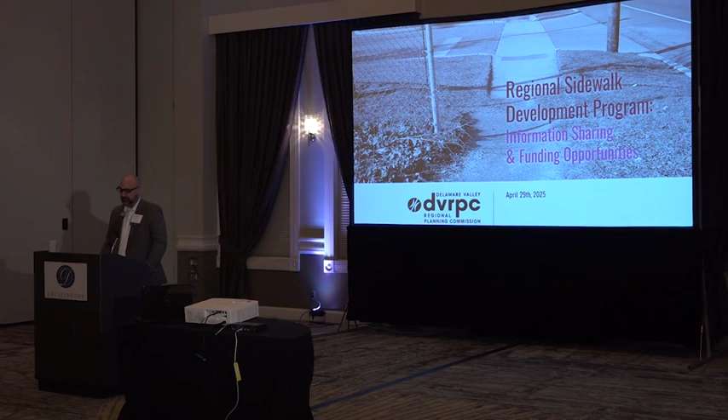My name is Joe Natale, the System Manager of the PA TASA program at DVRPC. If you don't know what TASA is, we'll get into that. I'm here today to present on the Regional Sidewalk Development Program, do some information sharing, and talk about funding opportunities, specifically TASA. That is what I do for my day job, so I'll be talking a lot about that, but presenting on a couple different sections within DVRPC.

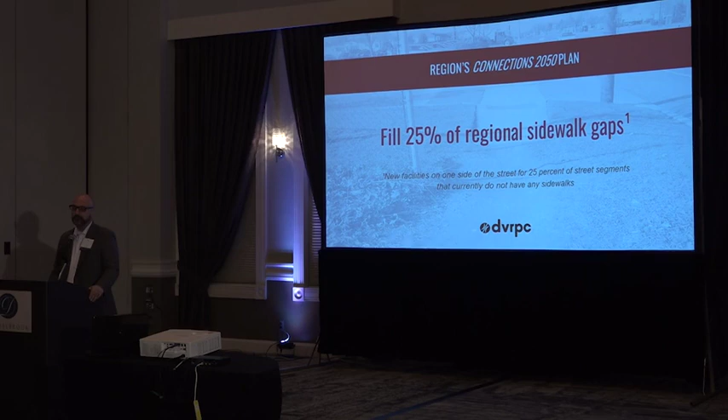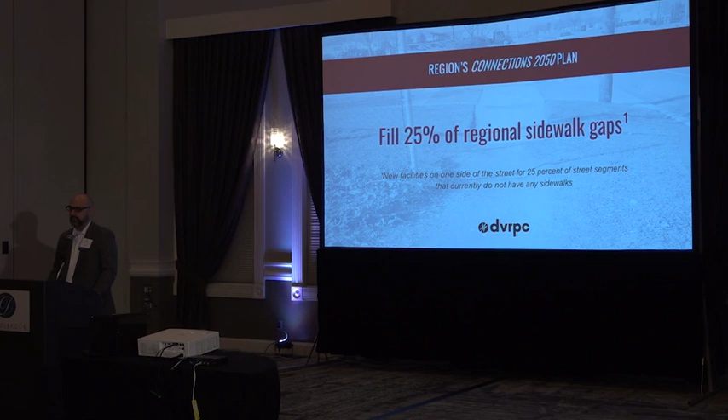For those of you that don't know about our Connections 2050 plan, there are many different sections of it, but specific to sidewalks, we're looking to fill 25% of the regional sidewalk gaps, specifically new facilities. We have a bunch of different ways to do this, and if you were in the session earlier with Allison and Ryan, they talked about a lot of the different resources that we have at DVRPC. I'm going to go through a few of them and some potential upcoming ones, and I don't expect us to go into the lunch hour, so here's our agenda today.

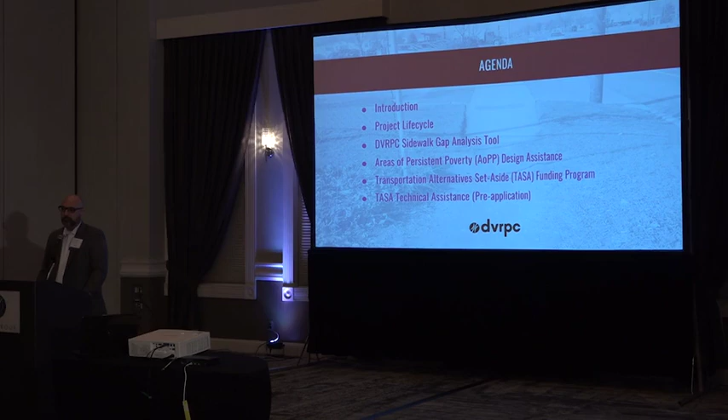Quick introduction of me, then go through the project life cycle for typical projects, specifically sidewalks, but also touch on trails. I will introduce the upcoming DVRPC Sidewalk Gap Analysis Tool, the Sidewalk Index, and talk about our Areas of Persistent Poverty grant that we applied for with SEPTA, which specifically has design assistance for these types of projects. I will spend a good amount of time talking about the Transportation Alternatives Set-Aside program, the TASA program, and its upcoming funding opportunity. And specific to TASA, we have technical assistance available, which I manage here at DVRPC.

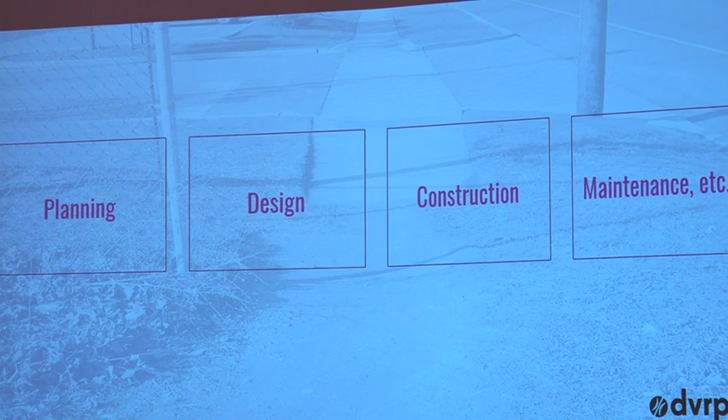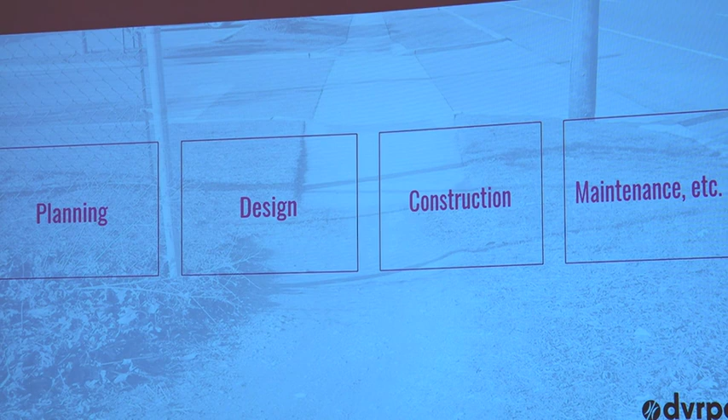As you might have heard in the previous session, or if you don't know, a typical project life cycle goes through a number of different steps. These are very top-level descriptions. All the planning efforts go into the planning box, which can take years or even decades for some larger projects. Once they get identified as priorities, they move into preliminary engineering and final design, which itself can take a number of years depending on the level of involvement with the state and federal level. Once those get advertised and bid, they go to construction, where they'll need construction funding, and finally, as the owners of the facilities, there will be maintenance and other considerations for different types of projects that you need to be aware of.

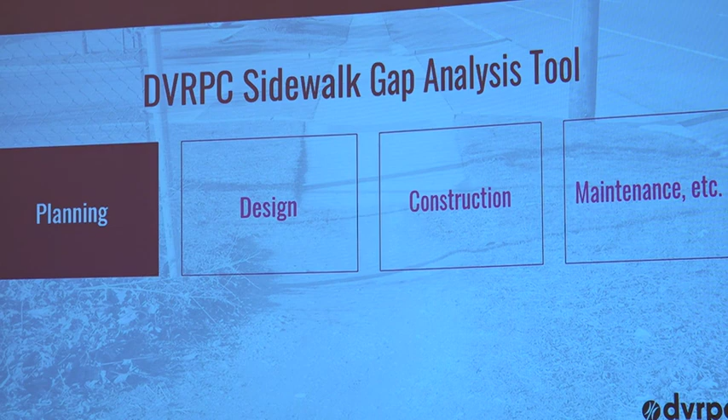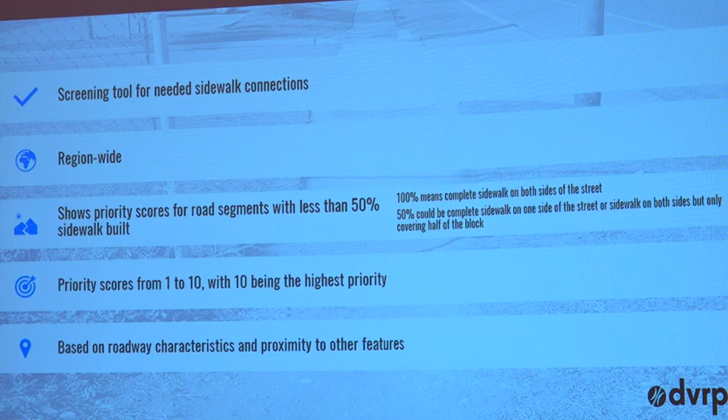Specifically, the DVRPC Sidewalk Gap Analysis Tool, the Sidewalk Construction Index - I'll talk about first, is a planning tool. You'll see on this slide there are a number of different steps to this that DVRPC staff have taken into account when developing this tool. It is still under construction, so it hasn't been publicly released. We've used it to do some preliminary analysis, but it is region-wide, and it is a screening tool for sidewalk connections.

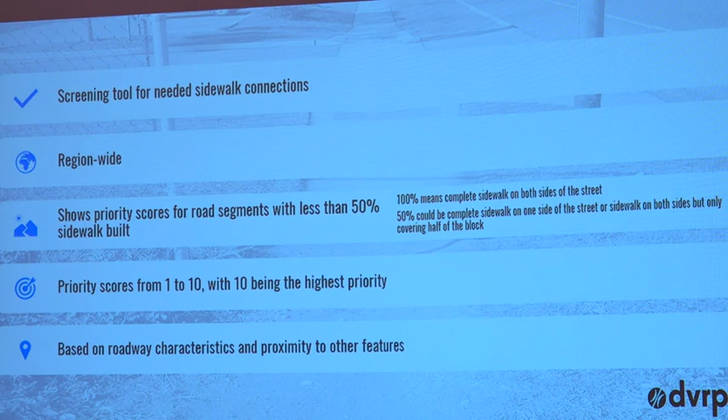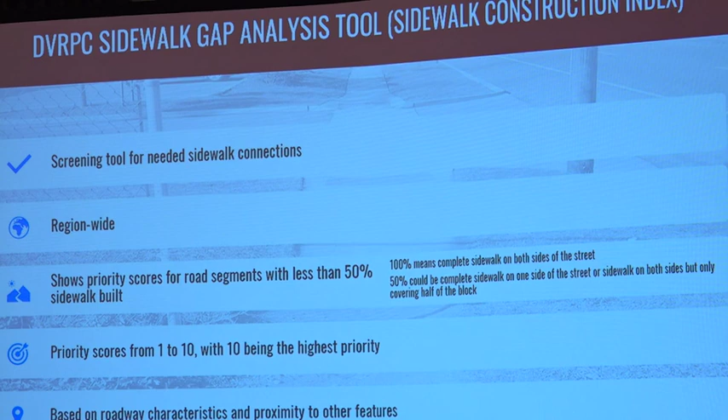Essentially, sidewalks and sidewalk areas will get a score that will allow municipalities, counties, or the state to prioritize different projects. It can show the priority for different road segments. It focuses on areas that have less than 50% of their sidewalks built, and it prioritizes them 1 to 10, with 10 being the highest priority. I'll show how the scoring system is currently laid out and will be tweaked.

We use the data that we have available to us, and it is a relatively computing-intensive scoring system. So we've already run this analysis, and the tool, when it becomes available, will be a simple GIS click-and-find-out information tool, where you can also input your own information.

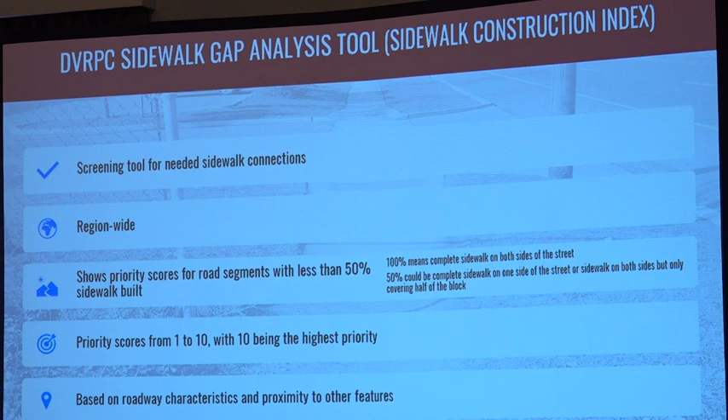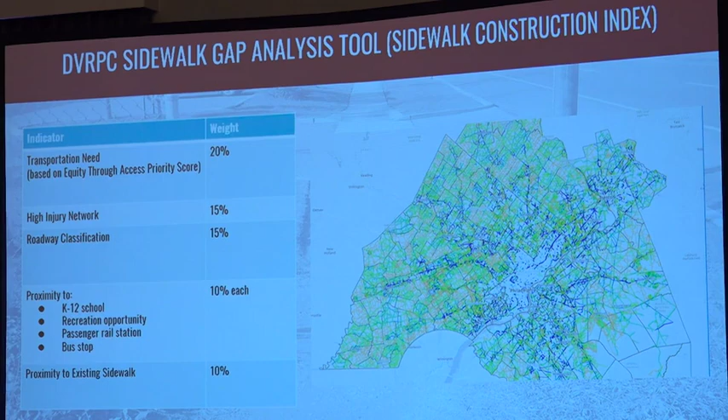So this is what it will look like on the right, not dissimilar to the PA1 map images we might have seen earlier, where you can zoom in and see different sidewalk gaps. Different colors will mean different things. This scoring rubric on the left is still being developed. It is not the final scoring.

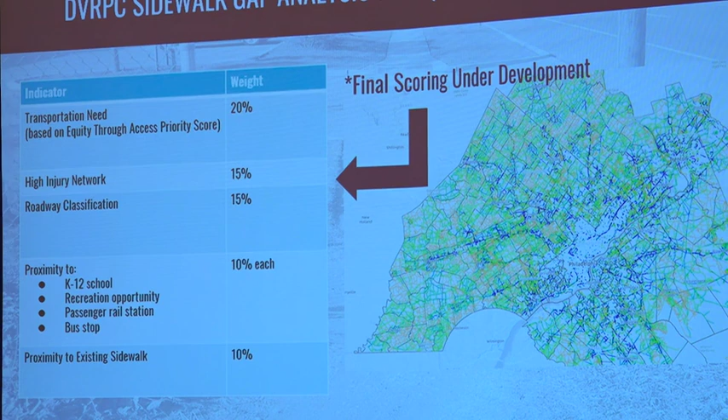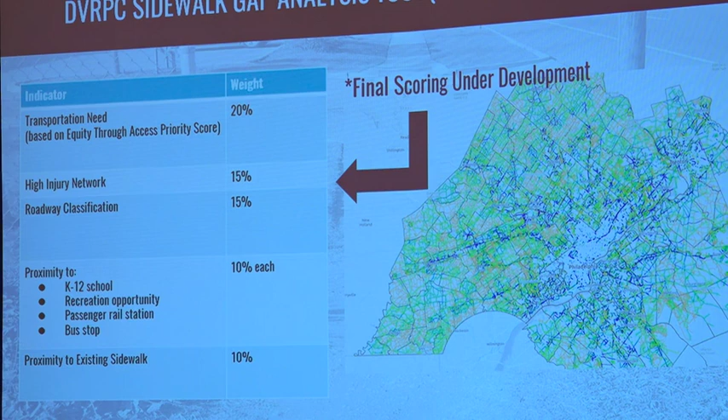We had some additional input from our partners as to what would make a valuable criteria - where the sidewalk gaps fall on the high injury network, their proximity to K through 12 schools, recreational facilities, bus stops, things of that nature, and then the proximity to existing sidewalks. We don't want to just build sidewalks even if there is a gap, making smaller gaps. We want to make connections, so find logical termini for projects.

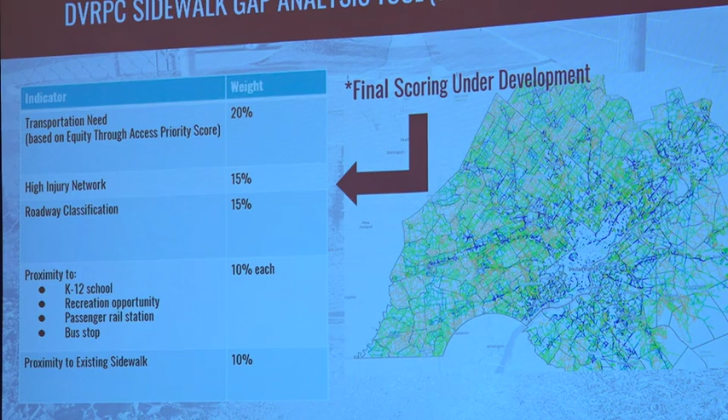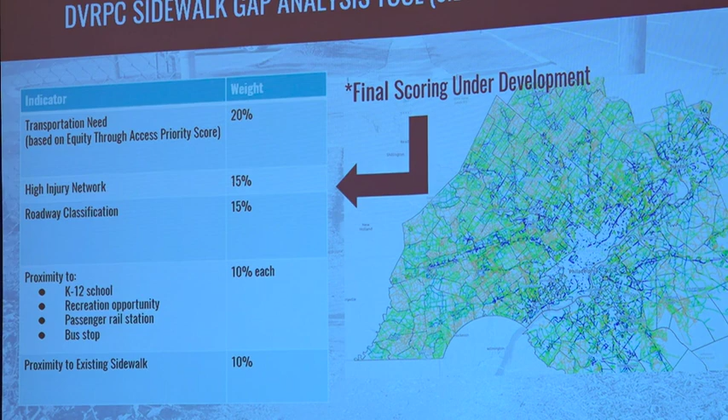So all of that goes into this computation that then identifies different scores for different sections. So when you identify different sidewalk gaps in your municipalities, you can then use them to prioritize where the money is best spent.

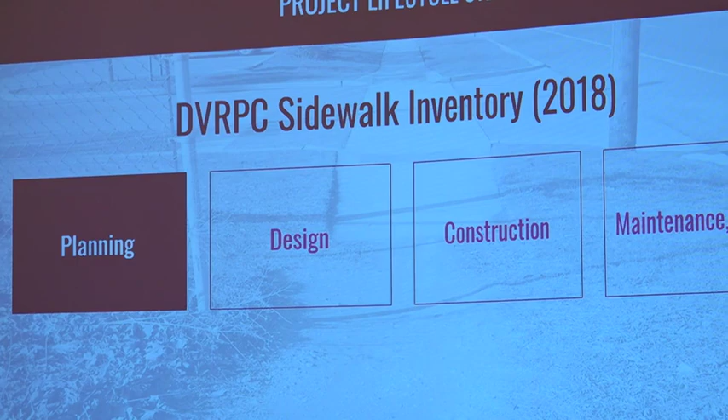So we do also have the sidewalk inventory, which is a little bit more robust, but is also an older data set. This is not necessarily used for prioritizing the same way, but you can view our regional sidewalk map at walk.dvrpc.org. You may zoom in and you'll see on this image it's not showing up great, but there are certain areas of the map where we do not have data. The collection for this data is relatively labor intensive, so as far as costs go, we don't update it too often.

However, you can provide this data to us. You can email me and I can get you that contact information, or I believe there's a way to do it on the website itself to suggest improvements. So you say, hey, we have a sidewalk here, on one side of the road, 2 sides of the road, we have ADA ramps. If you were to zoom in, you can click individual segments, individual corners and crossings, and anything we have data on in our database is a part of this map.

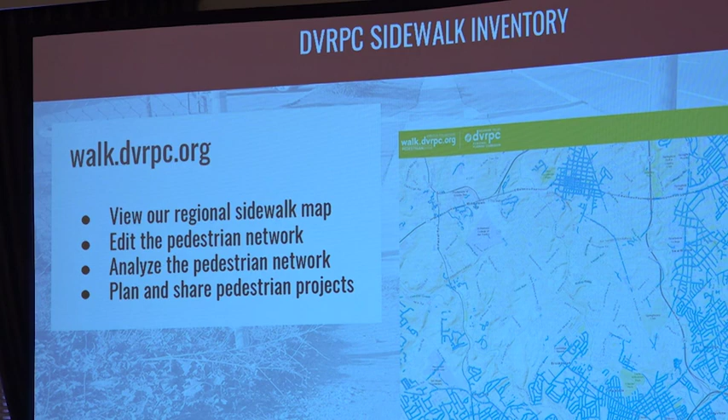You can use it to edit the pedestrian network, where you would provide updates that have happened since 2018 if they're not on the map already. Analyze your pedestrian network, plan and share pedestrian projects. This is a public database, so when you make changes, they would likely need to be things that have already been constructed. This is not a planning proposal - this is things that have already been constructed.

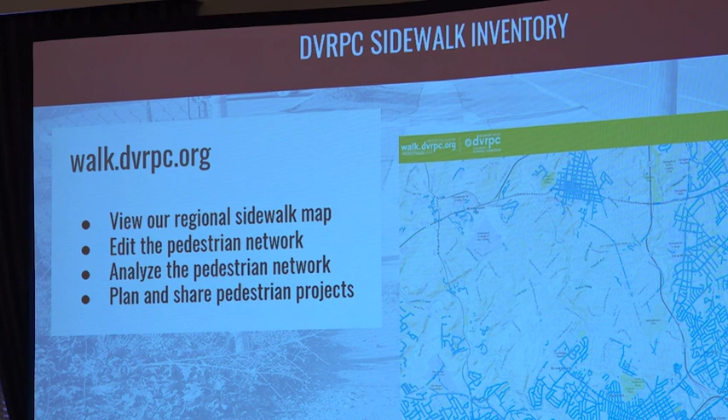Like I said, it was last updated in 2018. Incremental updates can be emailed directly to us or updated on the website, or submitted on the website.

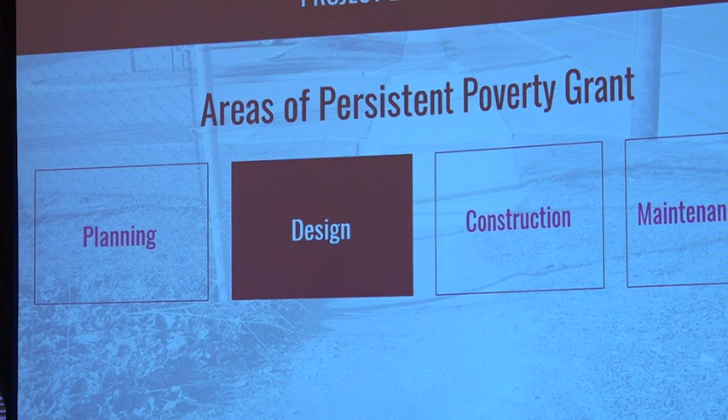So the Areas of Persistent Poverty Grant, which is a federal program - we see a lot, both on the planning side and in the implementation side, which is where I work, that a challenge to municipalities is the design. So design costs are very often the match for construction funding. Municipalities that maybe don't have the same amount of funding or cash flow will be more hesitant to apply for grants, for construction grants.

So when we made this application with SEPTA to the Federal Transit Administration, the intent was to provide that design funding. So I believe somewhere in the $400,000 range, grant funding will provide maybe 2 or 3 projects worth of design funding

to a separate construction funding program. So in partnership with SEPTA, we did apply and were awarded this grant from FTA.

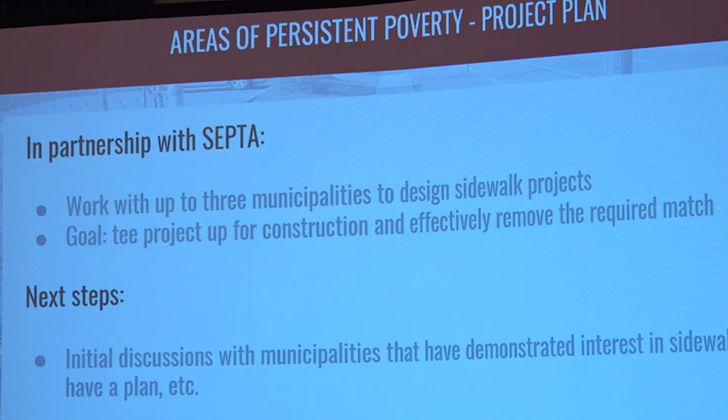We are currently soliciting municipalities who are interested in this design. It might sound silly, but we have a hard time getting municipalities on the phone and then following through with wanting to receive this funding. And they don't actually receive it - it's not a pass-through. We will be working with SEPTA to coordinate the designer. It's just we need buy-in. We need engaged municipal partners.

So it says at the bottom there, the initial discussions with municipalities that have demonstrated interest in sidewalk gaps. We are specifically looking for projects in or around SEPTA facilities, things that will connect neighborhoods to the SEPTA stations, bus stations, rail stations, things of that nature. Again, this will be covering the design costs, which is usually the match for construction. The intent being that once you have a designer underway, you could apply to another source of funding for construction.

It's not set right now for construction, but for example, the TASA program, which I will be talking about in a second, would be a great source of construction funding for this program, which essentially the only costs due to the municipality would be the staff costs. So your project manager on your side of things, coordinating with the designer, and someone like myself for the construction or design and construction.

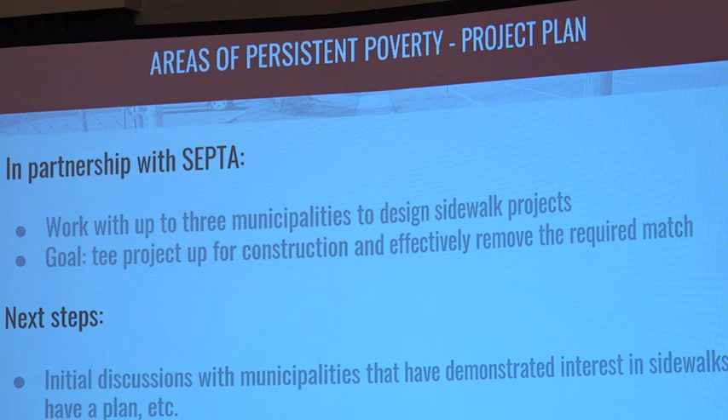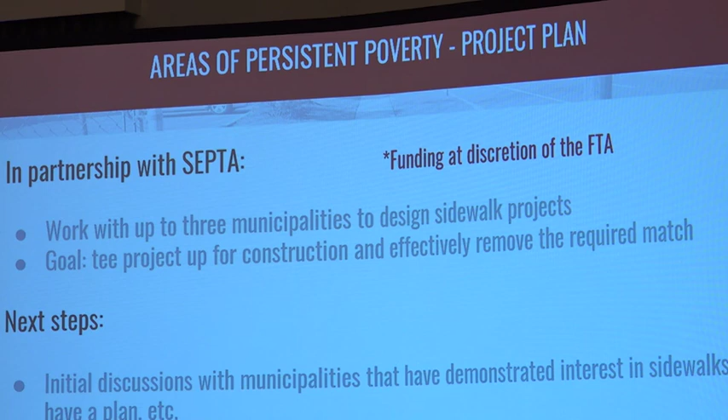As anyone who's watched the news is aware, this funding is technically subject to the FTA, so we're not expecting this to go away anytime soon, but we don't have a crystal ball, so in theory this could go away. We've had no indication of that, so we're moving forward with SEPTA to coordinate those project selections, and once we have the selections, soliciting an engineer.

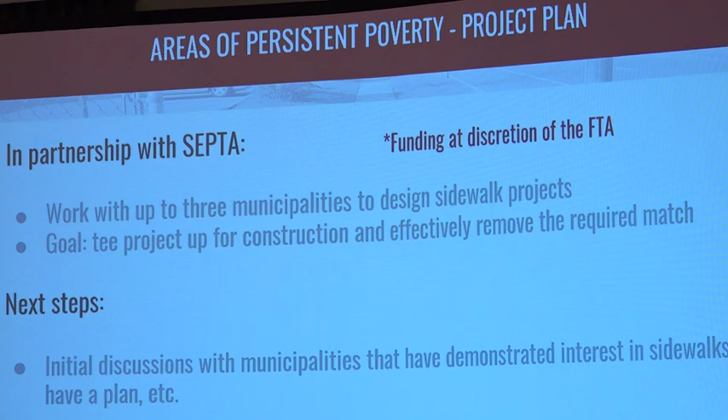I don't know if you're going to be able to read this. Oh yeah, you can probably read that. So these are using that scoring tool that's being developed.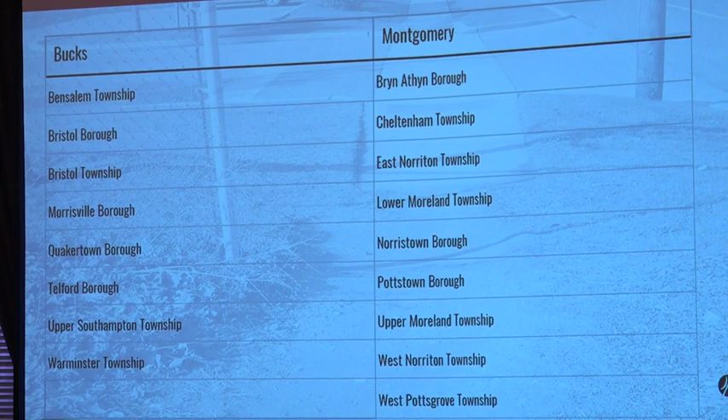First, the construction index. We pulled the list of municipalities that both have a certain score—I forget the actual score used, but some threshold—that have sidewalk gaps within a certain distance from a SEPTA station, and that also fit the persistent poverty criteria of the original grant.

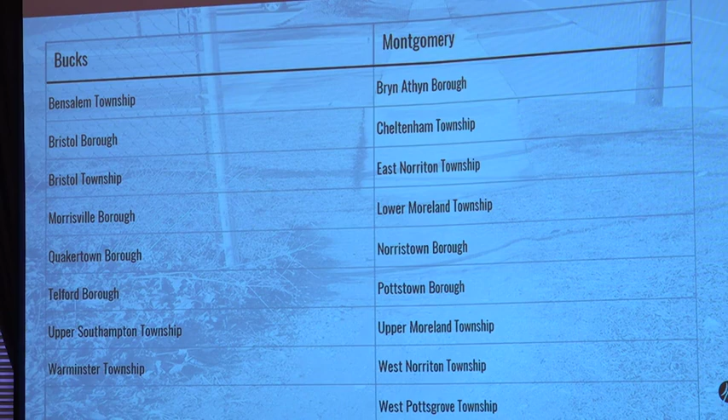So this is Bucks County and Montgomery County. If you're on this list and you're in this room, please come talk to me after, or send me an email, and we will get you at least a conversation, a quick Zoom meeting to talk about potential projects.

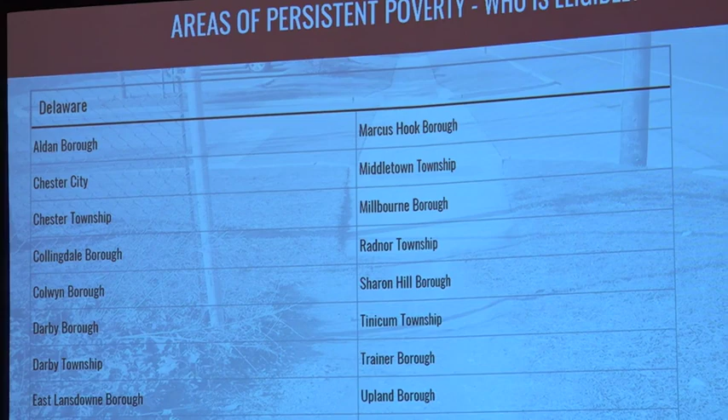You're probably more interested in the Delaware County one. So this is Chester, if you're on there. Let's see—yeah, there's the Delaware County municipalities. If you're on this list, I can bring this slide up again maybe towards the end of the presentation for Delaware County if anyone would like to look at it. And if you're interested in talking to us about the areas of persistent poverty grant, please talk to me.

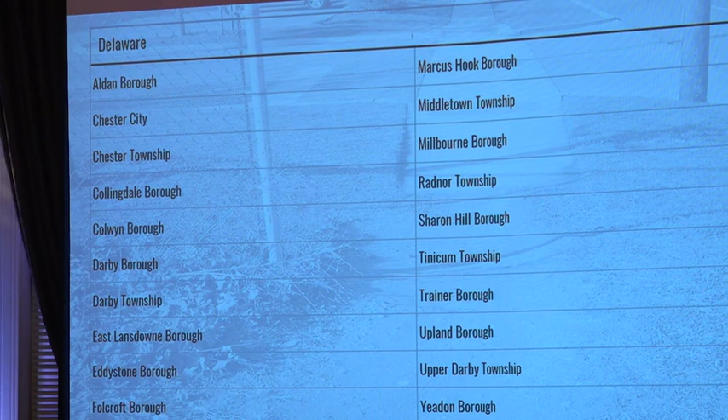I think I already covered this slide. Our municipalities with sidewalk gaps usually aren't applying for funding, because there are certain costs associated with even applying for these funding sources for construction. So we're trying to minimize that.

DVRPC has a couple different programs that do that, kind of like the supporting communities program that Allison had talked about earlier. This particular grant is for design, so it'll be more DVRPC staff assisting with the application process, but we want to make it as easy a lift as possible.

And I will talk about the technical assistance, which will help with that interim between planning and the construction application. So my whole bag is the Transportation Alternatives Set Aside, TASA program.

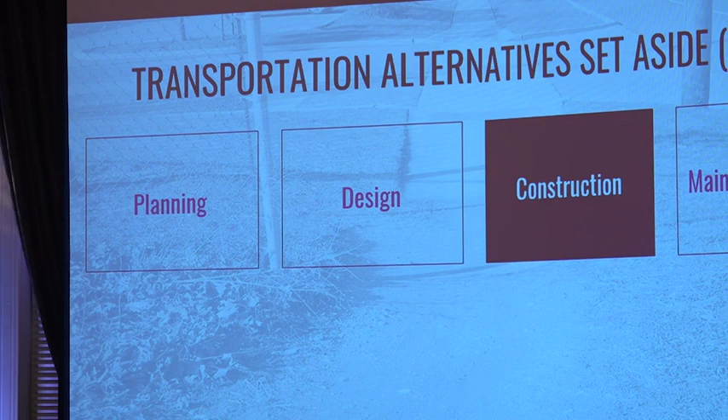These are what they call non-traditional transportation facilities, and I'll have a slide with all the different eligible project types, but 90% of what we see come in are bike and pedestrian facilities. So these are non-vehicular facilities.

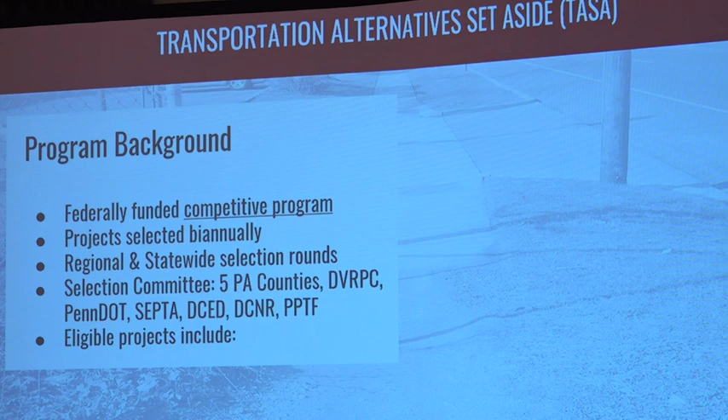The TASA program is a federally funded competitive program, and it's formula funded, so it is not discretionary, which is the bad word right now. So the state gets a certain amount of funding and they allocate it a certain way. The DVRPC region gets a huge chunk of it due to our population.

There's also a regional program where we get a pot of money and decide as a region, and then there's a statewide program. This is a biannual program, so every 2 years except for 2020 because of the pandemic—so 2021, 2023, and upcoming 2025.

There are 2 rounds of selection, although it's the same application process with roughly the same criteria. There's a regional selection, and then any project that doesn't get selected from the regional application pool gets sent up to the statewide level, of which we are also part of the selection process.

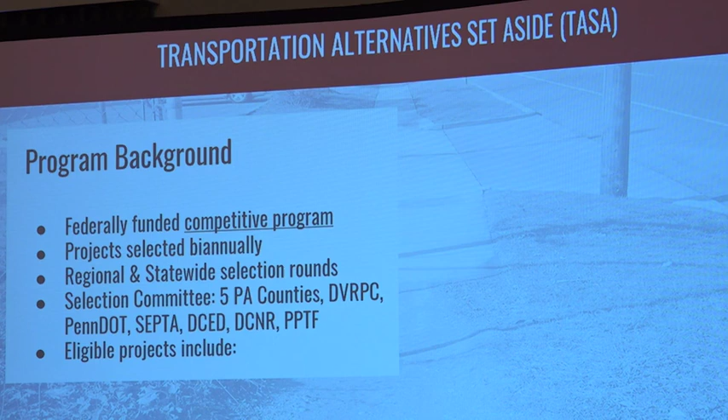The selection committee is made up of all of our planning partners—the 5 counties, Philadelphia and the 4 collar counties in Pennsylvania, DVRPC ourselves, PennDOT, SEPTA, DCED, DCNR, and the Public Participation Task Force, which is essentially made up of anyone who wants to be part of it, typically volunteers from our partners.

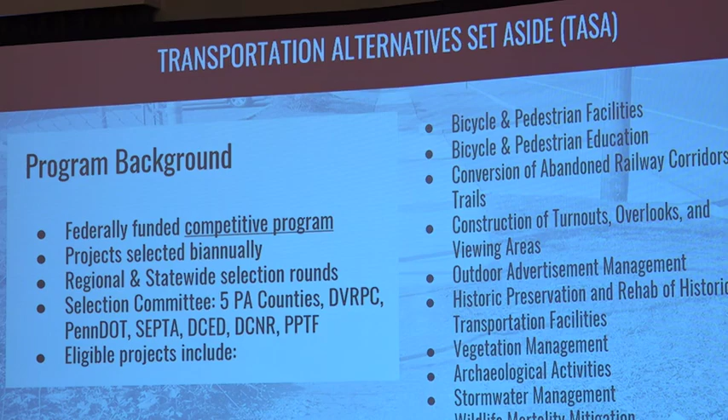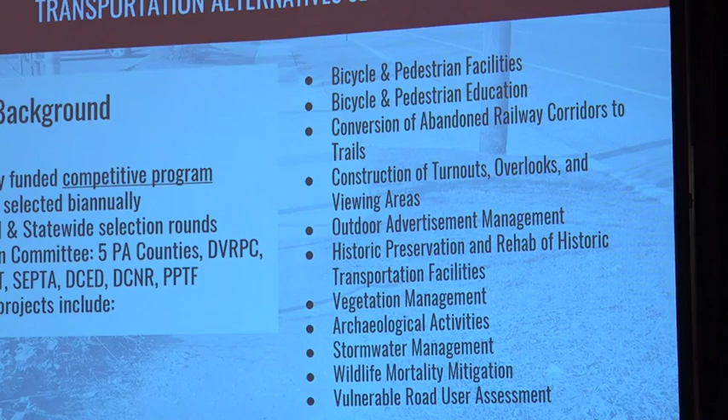Eligible projects include this list. You'll notice at the top, bicycle and pedestrian facilities. As I said, both from what gets applied for and what gets awarded, 90 to 95% of projects are bike and pedestrian facilities—trails, sidewalks, which is the point of today's presentation, crossings, ADA ramps, safe crossings, and pedestrian signals.

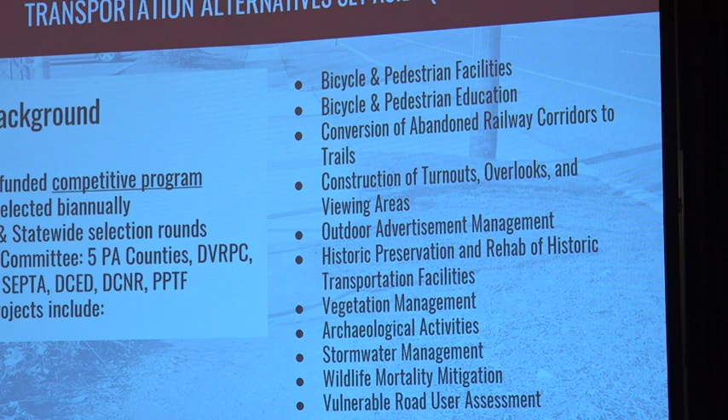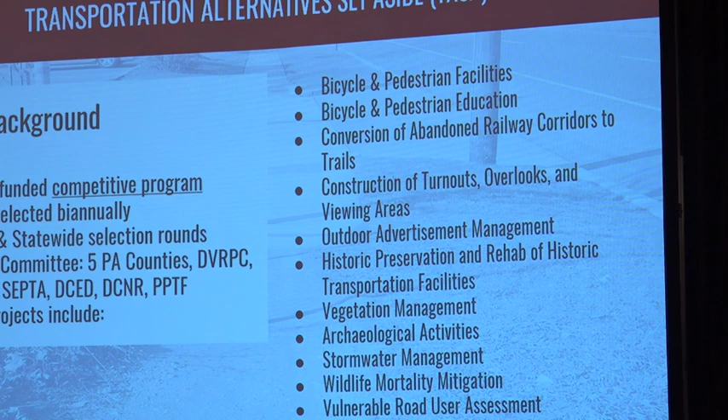We cannot pay for vehicular improvements with this program, although they could be part of the project through a different funding source—like if PennDOT is planning to redo an intersection and we want to combine that with ours. We've done that in Concordville, where we had a project putting in a trail, and PennDOT was putting in a roundabout, so they gave us their roundabout money and it became part of our project.

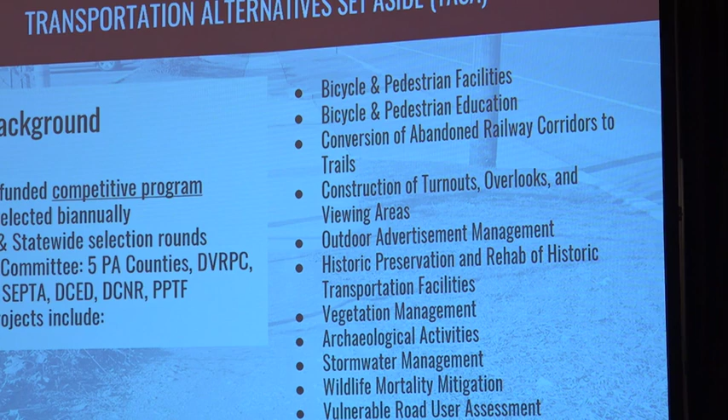Bicycle and pedestrian education are referred to as non-infrastructure projects. TMAs tend to be the ones that apply for those, doing outreach to schools teaching bicycle education and safety, or community outreach, things of that nature, and you can get funding for that. It's not technically supposed to be staff time, it's preparation for the events, but we're pretty flexible with how that works.

There's a whole list of other activities that I'm not even going to read. They're in the slide. They're not usually what people apply for because they don't make as competitive a project in our opinion, in the DVRPC region's opinion, but statewide, those are eligible projects.

One thing people tend to be interested in is stormwater management activities. Very rarely do we get a solely stormwater project, but we do get stormwater eligible activities included in our trail projects. For example, we're working with Lower Makefield Township in Bucks County to develop a project where they got $500,000 of construction funding for a $2.5 million project. We're looking to finish that funding gap for what is essentially a sidewalk, but that sidewalk will entail a good amount of stormwater improvements along Taylorsville Road, which is the reason they need all that extra money. The sidewalk itself wouldn't be too expensive, but the stormwater work is.

We've seen vegetation management, archaeological and historical structures go up there too. They typically have to have a transportation history, which is more of a rarity. And what are you doing with that? Because it still has to be bid through PennDOT's ECMS, so it tends not to be as helpful.

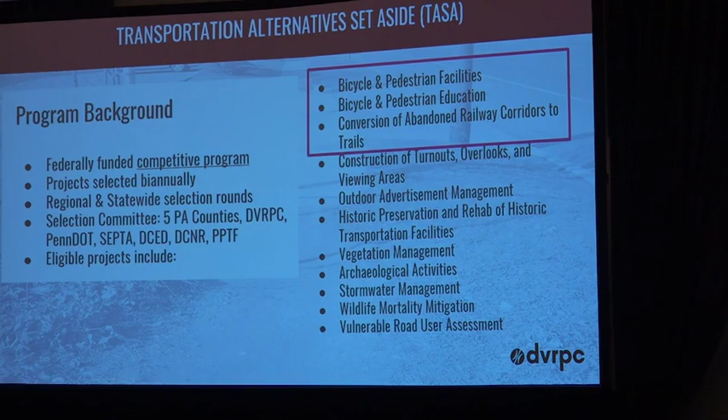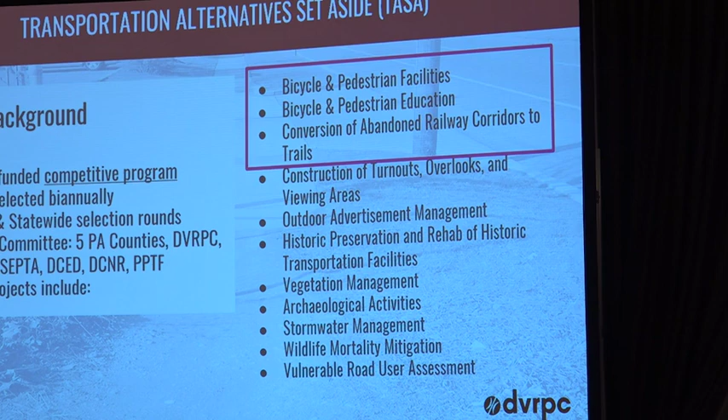Those top 3 bullets are what almost all of our projects that come in are for. The third bullet is actually just a specific type of project for the first one, because it's rails-to-trails projects like the Manayunk Bridge in Philadelphia. That was an old rail line converted into a very nice, wide structure. They actually got 2 projects, one for the construction of the facility itself, and another for the lighting and security system that allows it to be open 24/7 instead of just during daylight hours.

We then meet as a committee. The DVRPC staff, like myself and Joe Banks, manage the committee, which has separate DVRPC staff as voting members, but we manage the program on behalf of PennDOT, hosting our committee meeting in the late fall, early winter, making project selections for the regional committee, and then select which projects we're going to propose to the statewide level. I then sit on the statewide committee to do the same process, but against every project in the state, maybe 100 or 150 other projects to be competitive with. And then a certain amount of money gets allocated for that pot.

So we essentially have 2 different chances to get money for projects, and we can also split projects that are past the $1.5 million soft cap. The program does have a cap of $1.5 million for construction and construction inspection, but projects can exceed that if there's a demonstratable reason why they need to be over. For example, a bridge that is more than $1.5 million can't be cut in half.

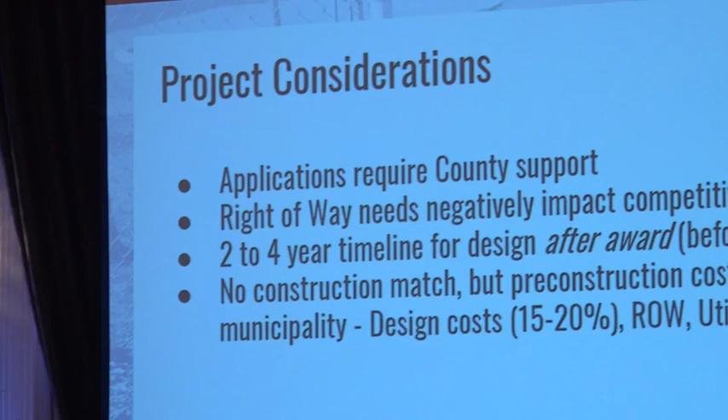Things to consider when making a TASA application: applications require county support almost exclusively. Right-of-way needs and environmental issues negatively impact your competitiveness of the project, but do not eliminate potential award, especially if you can demonstrate over the time between application and award that... yes, sir?

For the county support, would that be from the planning commission? Yes, the planning commission.

So like Peter Williamson, Lou Belmont, or not, Lou Huffnagel, Gina, all of them.

Like I said before, 2 to 4 year timeline for design. After you get the award in spring of 2026, 2 to 4 years is what we see for these projects. They could be done much faster, let's say if you did them yourselves or with your own construction funding, but because you have to do the federal process, which is the PennDOT process, it is a lot more paperwork and a lot more engineering costs.

There is no construction match, as often the case with some construction funding programs, because we say the pre-construction funds need to come from the sponsor, from the applicant. So those are your engineering design costs, your right-of-way utility costs that happen before construction, things of that nature. And that is, of course, unless you get an AOPP, Areas of Persistent Poverty grant, in which case design can be covered.

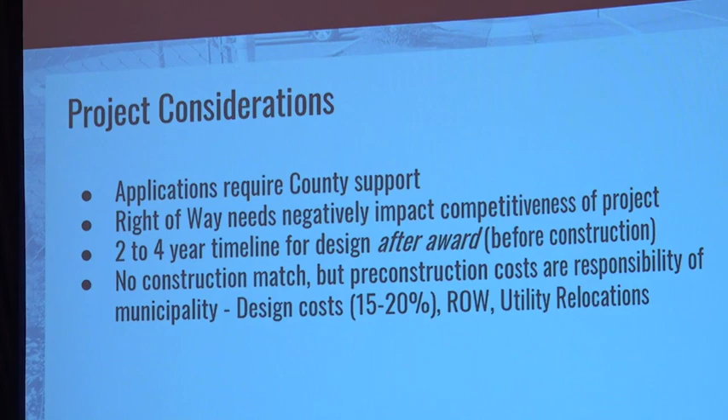But when budgeting these projects, if you're not getting that AOPP grant, if you're not one of the 3 municipalities that we may end up selecting for that, you should expect 15 to 20% of the construction cost in incurred costs by your municipality. So if it's a $1 million application for construction, plus some inspection money, you should expect and be able to show that you've budgeted for $200,000.

That all sounds like a lot to just build some sidewalks, so it is very important that you evaluate whether or not it's worth it. This is a longer, drawn-out process, a lot more red tape. The design takes longer, which then costs more money to pay an engineering firm.

And we see PennDOT costs, if you've ever bid a project through ECMS and through PennDOT, contractors bid their projects a little higher rather than a municipal level project. The same sidewalk could have a 50% increased cost. So what might cost you $400,000 might cost $700,000 with our program. Just things to keep in mind. Doesn't mean you've got 400 lying around and can just throw it at a sidewalk and not come to the program. So make sure it's worth it.

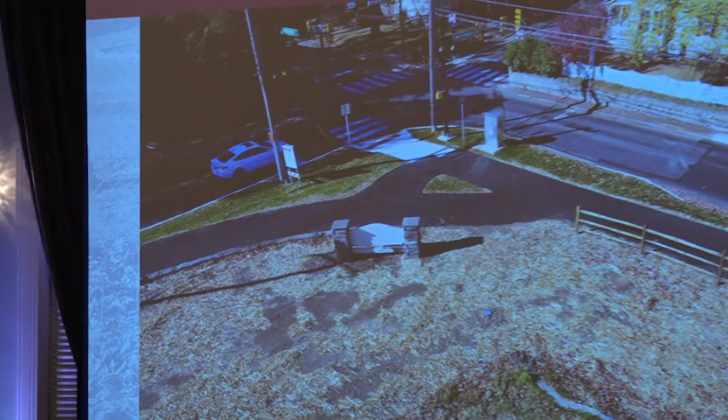Here are a couple quick examples of some projects that we've built over the last couple of years. This is in Abington, the Jenkintown Pennypack Trail. This was something like 1.5 miles of 10-foot shared use path connecting a school and a park, and then there was another section that connected a different section of the park to some public transportation facilities like other sidewalks.

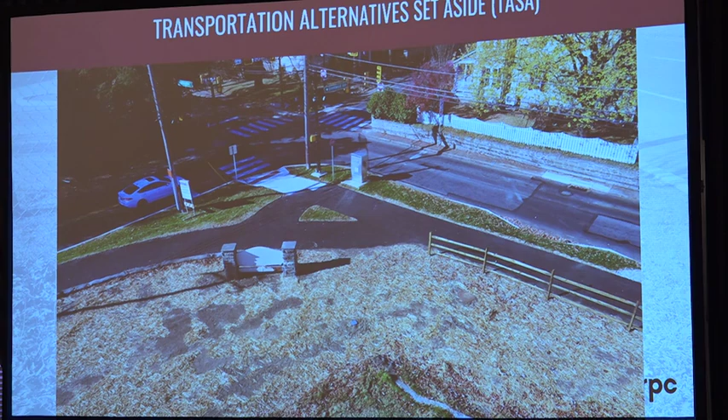This was originally one project for the shared use path, and then the township was going to be doing some stormwater work. Like I said, it made a lot more sense, it actually saved them some money to combine them. They had to contribute the money via their other grant for the stormwater work, but we were able to combine them and get them all done at the same time.

This is actually the other end of the photo that Allison showed in her presentation. This is in Lower Salford, just, I think, maybe like 800 feet of sidewalk and pedestrian safety and crossings in Lower Salford Township. This wasn't a complicated project. It happened to go through design a little bit faster, but the facility itself got built very nicely. It was designed, there was a lot of room on the roadway, so the projects can be relatively straightforward.

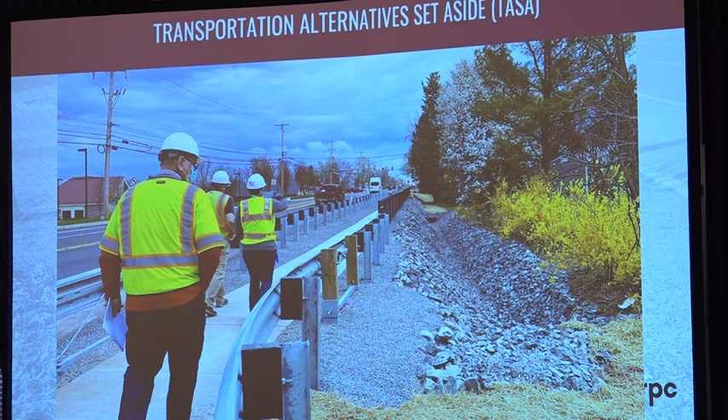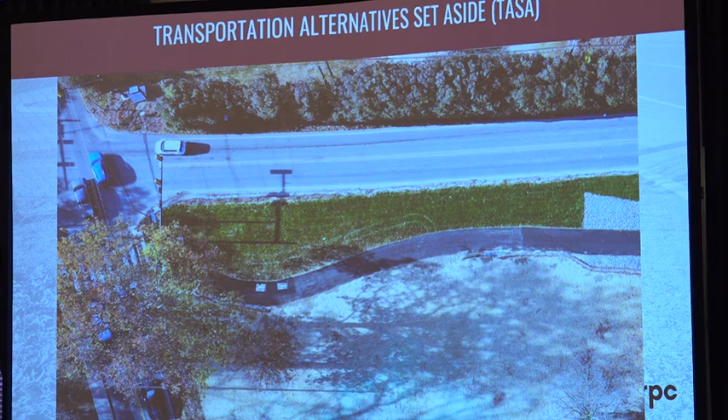They can also have obviously complications, but this is the other end of the Jenkintown Pennypack Trail project, just showing that we connected to an intersection. You can't quite see it in this photo, but that connected to an updated ADA ramp, that connected to a separate ADA crossing that connected more sidewalks throughout the township, Abington Township.

This is the Tookany Creek Bridge. That was a phase, I forget what phase number, one phase of a larger regional trail program project that is, I think, still in design right now, or is in construction, but a couple different sections of trail got broken up into many different awards. So Cheltenham Township and I think another neighboring township got these awards, and over the course of maybe 5 or 6 years got all of them funded in design and construction to then be built. And that is a pedestrian structure over Tookany Creek, something like 120 foot structure, and then being a little over $1 million just for the structure.

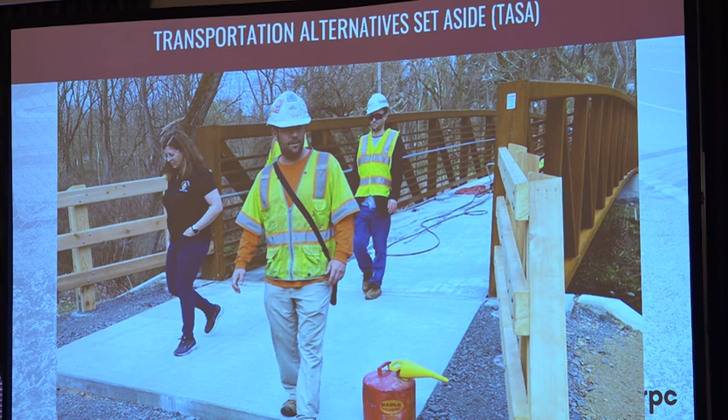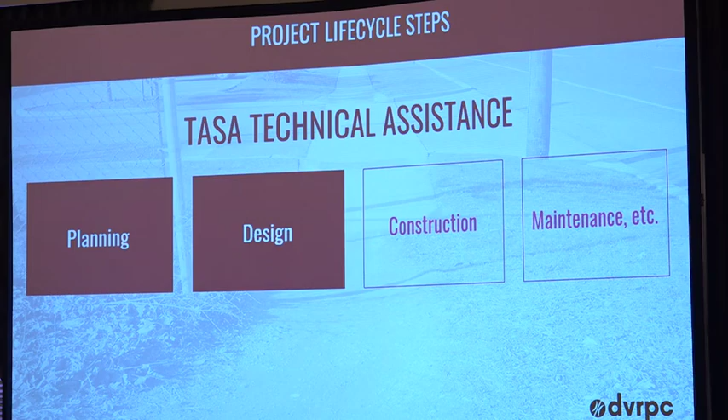So all that was the construction funding, and then the design process that the construction funding had to go through is a lot. Oftentimes municipalities that don't just have a bunch of cash lying around are hesitant to even apply for even design funding, but specifically construction funding, if they don't know their construction funding is going to get awarded.

So if you are asking for $1 million and you've already found your $200,000 for design, you still have to spend $40,000, $50,000 just to apply, just to get the conceptual engineering done and maybe some initial tasks like a cost estimate. All that costs money to pay an engineer to do and then have your staff do. So it was in the IIJA last round that we could set aside 5% of the funding for technical assistance and project development, and that's what we did.

We received it from the state level, so we didn't actually take away from our regional pot. But it's funding that can cover these vague planning and early design tasks. That's 5% of the statewide TASA funding.

So this is a program where we issued an RFQ and selected Michael Baker as our consultant. They have a pretty strong history of success with the TASA program, and they are able to perform engineering tasks for us on behalf of municipalities.

So these are the potential engineering tasks we can perform right now, before an application is submitted. The summer application will be announced soon and completed this summer. If you only have a project idea and are looking to get some concept together that you don't have the capacity for right now, come to me.

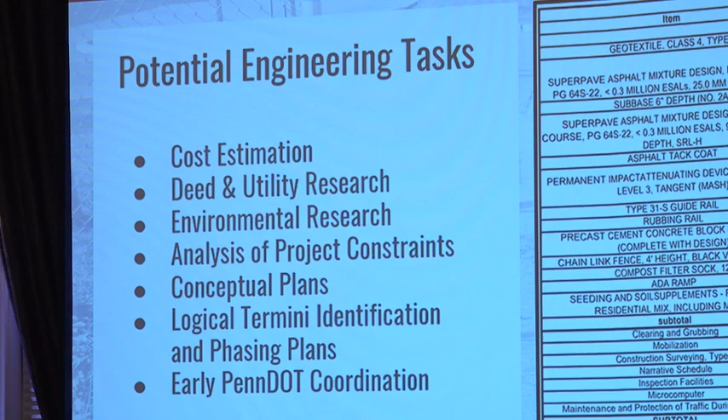Delaware County had a project on McDade Boulevard they wanted done, and we were able to get the right PennDOT staff on a call, get Michael Baker to weigh in, and perform some preliminary concept plans and engineering estimates to move the project forward. They'll hopefully be coming in for a project this summer. So that's a cost estimate.

I don't know how well you can see these, but these are the deliverables we've been providing to municipalities. These are not final design plans, barely preliminary engineering plans, but good enough for the application.

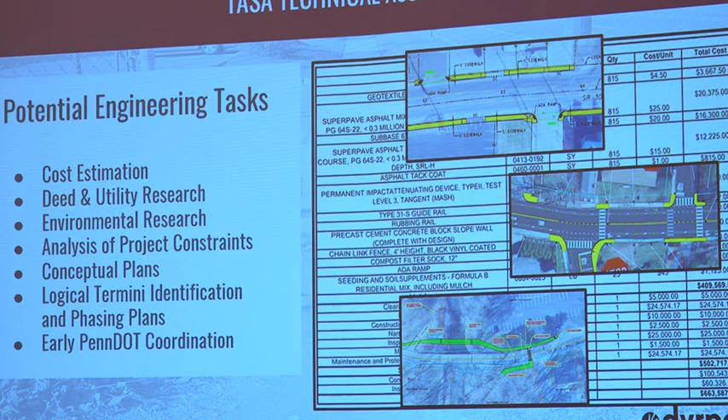So rather than paying your own engineer, or hiring an engineer to spend $20,000 or $50,000 to do these plans and investigation, we can do that on your behalf. Maybe it saves you half of that cost, maybe most of it, and your staff takes the rest of the application to 100%.

Oh, I thought I had another slide. I guess not.

So that is the TASA technical assistance. I don't have a ton of other content. I can talk more about the TASA program—I could probably talk about that all day—but if you have any questions, I'm happy to take them now.

We have capacity for at least a few more technical assistance tasks between now and the summer. They take some time, and there's only really one team working on them, so it's first come, first served—we do them in order as they come in. But we should have time to complete any interest in Delaware County, at least, between now and when those applications open.

Should you have any questions about the sidewalk inventory and all that information, I can of course pass that along to the appropriate staff at DVRPC. Cassidy Boulin is the manager of that program.

That's all I have for today. Are there any questions?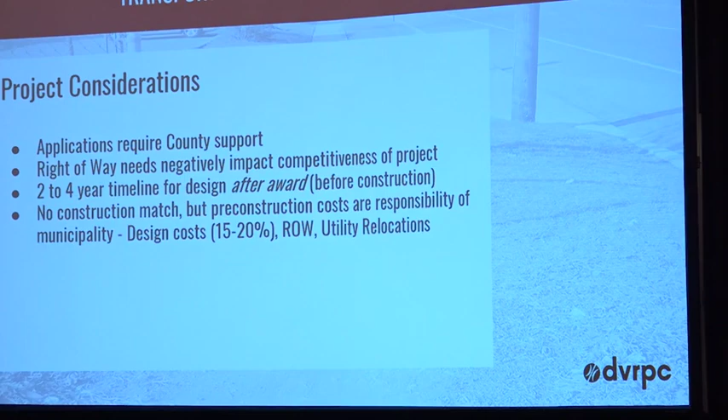Near a SEPTA station—if it gets people to that SEPTA station, if you can make an argument that it gets people using SEPTA more—if you've heard anything today, it's that SEPTA needs more users and needs more money. So that's the point of this grant, to facilitate that in areas that meet the persistent poverty criteria.

I'm happy to talk, happy to pass that information along to the people running that program. I'm part of that program, but there's someone else running it, not me. Please come talk or email me however you'd like to do that.

Any other questions about this or the TASA program? Again, please find me afterwards—I talk about TASA all day.